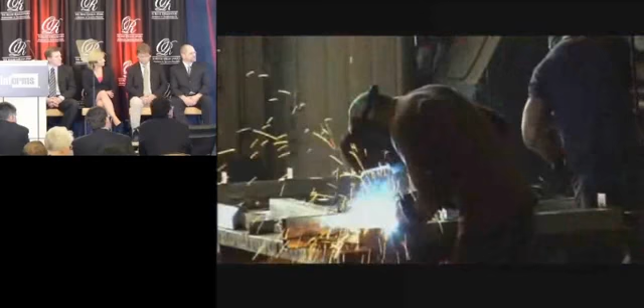For here, in New Brunswick, you can be yourself. You can belong. You can be better. This is truly what it means to be in New Brunswick. This is our story. This is our time. This is New Brunswick.

Aside from our interest and commitment to the Edelman Prize and the OR community, we all have something in common. We have traveled on highways to come to this event. Let's not forget how significant a role highways play in the day-to-day activities of our families, our communities, and our businesses. Good afternoon. My name is Dale Wilson. I'm the Assistant Deputy Minister of Transportation in the province of New Brunswick.

It's my job to help lead the rejuvenation of the agency from the inside out in a way that allows us to intelligently move forward in a period of constrained resources. Right now, New Brunswick is delivering a high-quality and sustainable highway network through the practical and effective implementation of operations research. Today, we're going to share our success story with you.

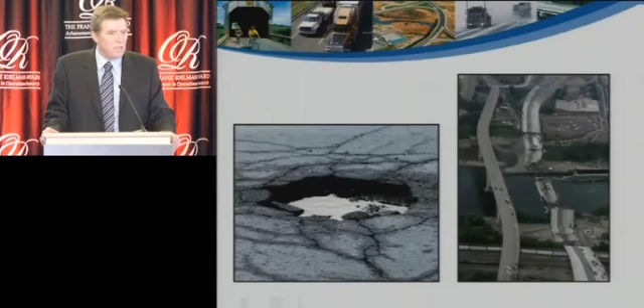We needed to be able to establish a long-term plan for strategic infrastructure investment that was based on science, and we had no idea of how we were going to do it. That's where our team and operations research came in. They conceptualized an approach that did away with planning and budgeting in silos. They implemented a solution that included all asset classes and moved from a fix the worst first approach to one of least life cycle costs. They developed a tool that optimized investments and scheduled maintenance and repair across all asset classes. The result has seen significant benefits to our department, our province, and the taxpayers.

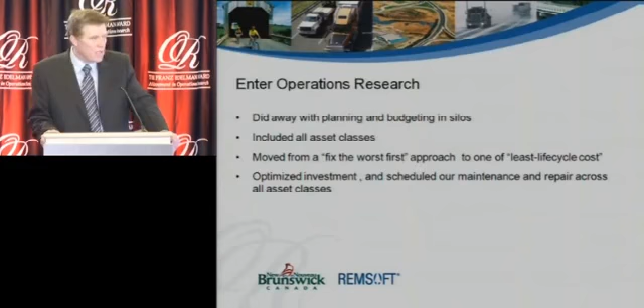Today you will hear about a province that needed to act, and to act fast. Our infrastructure was deteriorating quickly. We will tell you why operations research was the only way that we had that would address the challenge, and we will describe the operations research underpinnings that advance the theory and practice of transportation asset management.

We will show you an analytically driven process for evaluating requirements and scheduling maintenance and rehabilitation activity, and a tool for choosing among multiple and conflicting priorities over the long term. We've already produced savings to the taxpayer of $210 million and can see $1.4 billion additional dollars over the long term. And this is coupled with a significant overall increase in road quality.

Next, I would like to introduce you to my Minister of Transportation, the Honourable Denis Landry.

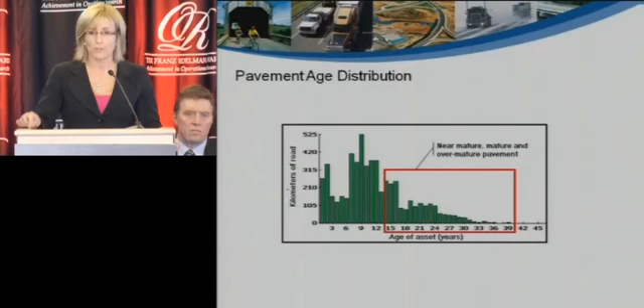Roads were deteriorating faster than we could repair them. Our infrastructure was literally crumbling. But we didn't have a way to show this to government leaders. We needed a radically different approach, and we needed to act fast. We needed a solution that clearly demonstrated to decision makers the full scope of the issue we faced, gave a solid justification for a long-term budget increase, and allowed us to start immediately, and then over time add more assets and data as they became available.

Our solution had to be able to consider multiple assets in the same model and had to perform trade-off analysis and network-level planning that would allow optimization across all asset classes over the long term. It had to model asset use due to socioeconomic factors and fluctuating traffic conditions as well.

It had to deal with adjacency and proximity issues. That is, the interrelationships between pavements, culverts, curbs, sidewalks, signs, and other features. The solution had to allow for multiple and conflicting constraints, including budgets.

And as a public organization, accountable to the taxpayers of the province, the department had to ensure that the plans would be transparent and defensible, enabling buy-in from decision makers and support from the public. Finally, the new solution had to be implemented within existing resources and without additional staff.

Our first step was to investigate the state of planning and best practices and new technology approaches worldwide. While we didn't find a solution that met our criteria in the transportation sector, we did identify an OR-based solution that matched our criteria and had been successfully implemented in the natural resources sector at hundreds of sites around the world. In fact, the technology had become the standard for the forestry industry, which is a major component of the

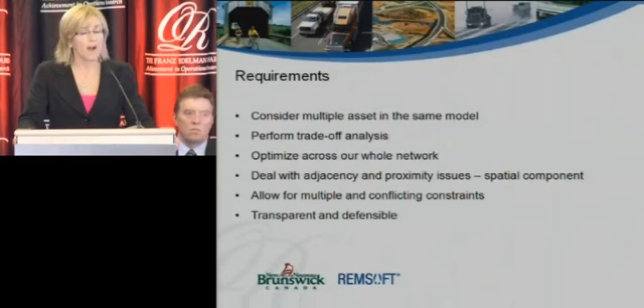With that information in hand, we moved to tactical planning tools to allow us to group assets together based on adjacency and proximity. Finally, we adopted a process for our engineers to review and assess the model results in candidate projects and work together to make final choices. Next, Hugo Funekes, Chief Technology Officer at REMSoft, will describe the technical, theoretical underpinnings of the solution.

Due to the highly spatial nature of the problem, the number of assets we had to consider, and the long time horizons involved, developing a single model that incorporated all aspects of the problem across space and time would have been difficult, and solution using exact methods would have been cumbersome at best. However, hierarchical planning approaches are used in a wide variety of applications.

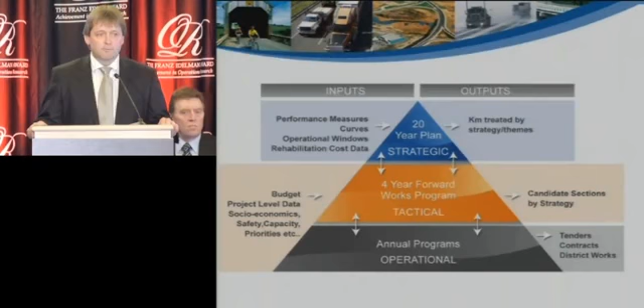In this instance, the Department have adopted an approach which is based on problem decomposition and uses separate but linked models to solve the problem in stages and at increasing levels of detail. In the first stage, an LP model addresses the long-term strategic aspects of the problem.

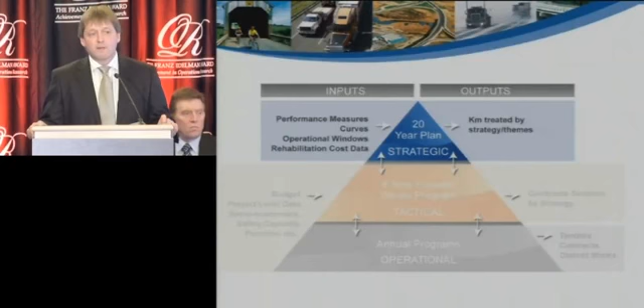This tackles many of the decisions necessary for the global planning problem, and the resulting schedule of activities forms an excellent starting point for the operational planning stages that incorporate increasing levels of spatial resolution across shorter planning horizons.

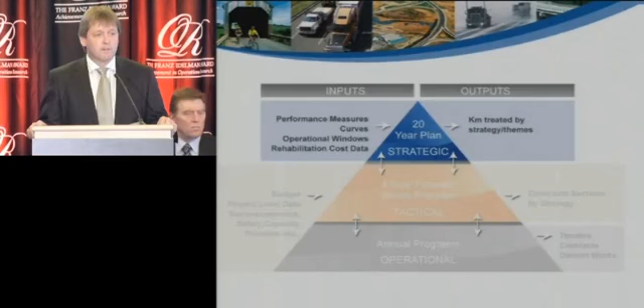In the second stage, we use the schedule from the LP along with a heuristic algorithm that uses adjacency and proximity relationships to create a more spatially reasonable, spatially explicit schedule of activities. This algorithm takes a meta-heuristic approach, incorporating Monte Carlo integer programming for initial program grouping, bipartite matching and enumeration for initial scheduling, and a greedy algorithm to achieve balanced workflows and costs.

And at the operational level, candidate projects are given to program managers, who then make final expert judgments on whether the model has suggested valid candidates. They review performance and look at videos of the highway surface and make adjustments for reasons such as functional improvements, operational considerations, and non-condition factors such as safety.

And of course, directives and operational budgets are monitored to ensure the overall program development reflects the strategic treatment established by the global LP model. It's easy to see the difference between good and poor quality roads. However, to develop a mathematical programming model requires more rigorous and quantifiable methods.

Fortunately, road quality is described through the use of numerical indices that have been developed according to international standards. For example, the International Roughness Index is a measure of road roughness. It is calculated by taking calibrated measurements with a laser while driving over a road.

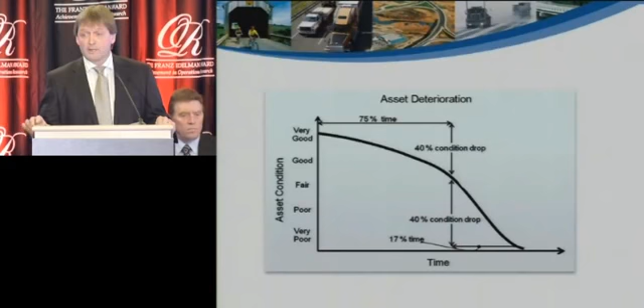End of useful life is another important concept in pavement management. Asset deterioration curves are specific to each of the various classes of roads, and depending on the road class and the nature of the last treatment, end of useful life can occur from 5 to 15 years after the last road repair. Another consideration is that as the asset deteriorates, the number of treatments available will change, and the costs associated with them can increase in magnitude dramatically.

An early step in the development of the model is to determine the number of unique instances of these curves that are required, and then to assign them to the appropriate curve in each class segment of the 18,000-kilometer highway network. Once treatment alternatives are defined, deterioration curves for each road class are developed, and the current inventory of assets is initialized, the conceptual modeling framework for asset management is essentially complete.

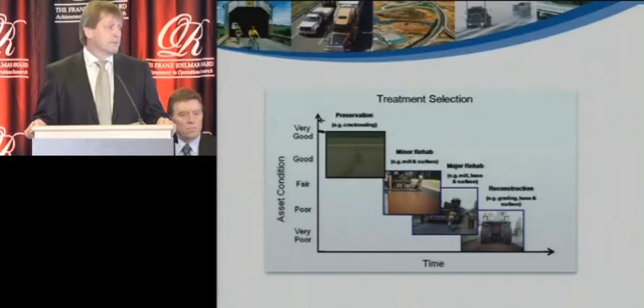The resulting solution addresses the strategic questions of appropriate budget levels and rehabilitation activity, and provides a schedule of activities to meet the department's objectives of service levels. That is the required condition for the roads over the entire planning horizon. However, we aren't starting now with projects that are grouped and ready to implement. At some point, spatial relationships at the project level must be addressed. The reason they were ignored at the strategic level is due to the combinatorial nature.

For example, if the department broadens the definition of proximity from two segments physically touching each other to considering all road segments within a 20-kilometer radius, they increase the number of proximal relationships from 28,000 to over 2.8 million. And given the department considers radii as large as 50 kilometers for grouping, problems can become very, very large.

However, from our experience in spatial planning, we know that problems of this nature can seem largely intractable to solution by exact methods. Therefore, we employ heuristic methods that quickly generate feasible solutions that are amenable to input from non-OR experts. Typically, the spatial schedulers run for 10 to 20 minutes, generating hundreds of solutions, and the top 5% are usually retained for consideration.

Next, I would like to introduce you to John McNaughton, Manager of the Asset Management Program at the New Brunswick Department of Transportation. John will describe the solution and planning process as it is working today.

As program manager, I was tasked with finding the answers to the following questions. How, when, and where should treatments be applied? What will be the effect on overall condition of the network? And what is the least cost for maintaining the status quo condition of the network? I should point out that while I use operations research every day, I don't have to deal with the math. I understand optimization and heuristics, and the natural modeling language used in the Remsoft modeling framework lets me develop a sophisticated LP model to address these questions.

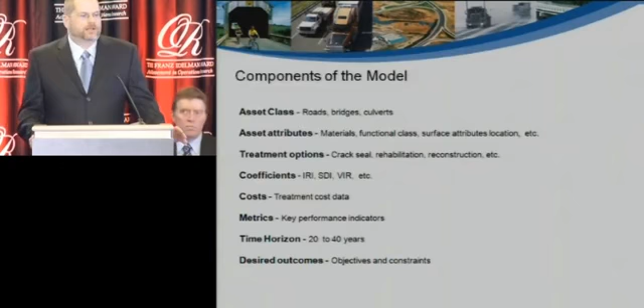And that's it. That's all I have to do to change my model. The ease at which I can set and change my model is very important to the department, since scenario and trade-off analysis is a key component of what we do.

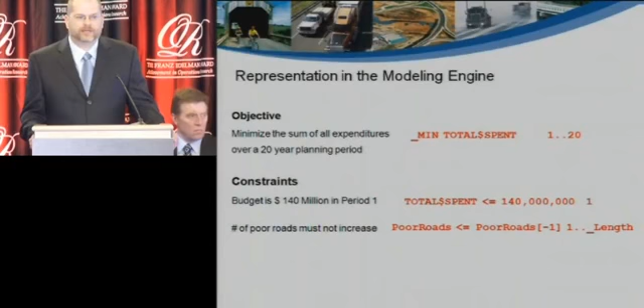We regularly get requests from our minister and other central government departments about the impact of a change in plans or budget. For example, if the minister is getting heat in the legislature related to our highway system and asks us about changing the plan, I can easily change an objective or constraint and re-optimize. I can show them the real effect of deviating from the optimal plan, and I can calculate the actual costs related to it.

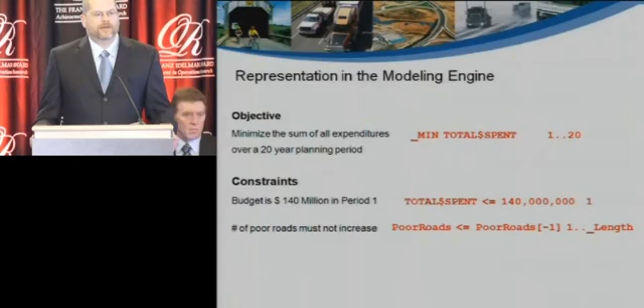Once I describe what was in my model I showed you earlier and specify my objectives and constraints, the software takes care of all the other housekeeping details for me. It reads my model, translates it into a matrix, and hands it off to a commercial solver, which solves the matrix and hands the results back to me.

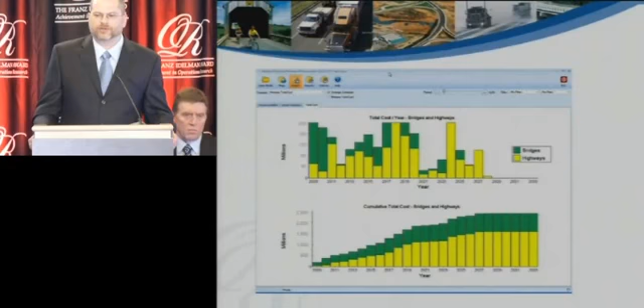Once final decisions have been made about these issues, the problem then shifts to how to implement the strategic plan on the ground. A key issue here is that the candidate projects identified by the optimization need to be grouped into functional projects such as those Hugo described earlier. Just because the spatial constraints were not considered in the strategic model doesn't mean that we can't identify the location of their treatments and their associated timings.

We can. All the attributes and outputs in the model are linked to our maps so we can explore the strategic solution spatially as well. This is an important tool for us in communicating our plans to politicians and other stakeholders. We can show them exactly where and when an activity will be happening over the long term.

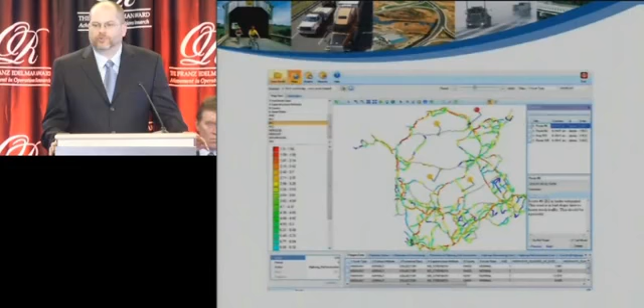At the same time, many of the scheduled projects still need to be modified to meet operational realities, such as minimum contract size, potential disruptions to traffic flow and safety. We need to group projects together in a way that makes sense from a spatial standpoint to achieve this. Here's an example of scheduling maintenance on a single asset type.

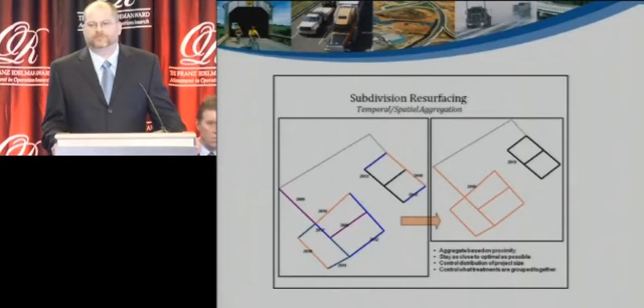Once I have candidate projects identified and grouped together, I turn them over to the district regional planning teams for evaluation and input. They scrutinize the candidate projects for potential problems, considering issues ranging from contract letting to reviewing video of road surfaces to verify road condition. Changes to the candidate projects may require only minor adjustments, or they may ultimately lead to changes in the strategic model.

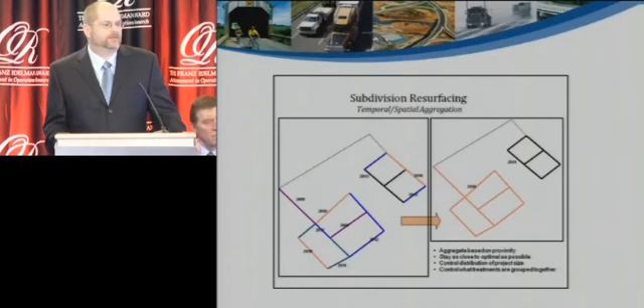And the hierarchical approach we have taken facilitates adaptive management and lets us build in a process of continuous improvement, something we set out to accomplish from the beginning. Next, Kim Matheson will describe to you the impact the solution has had on our organization and some of the benefits we are seeing as a result.

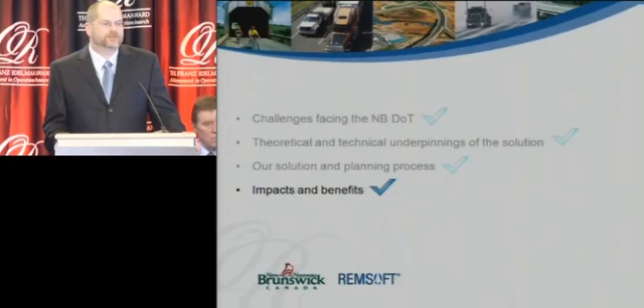Our asset management solution has met all the criteria we set for ourselves at the onset of the project. The very first and most important benefit we realized as a result was that we could now clearly demonstrate the infeasibility of the old approach, the long-term benefit of the least life cycle cost approach, and the need for a substantial funding increase. Let's look at what we found in a series of scenarios we ran early in the project.

To illustrate the consequences of each scenario to senior management and government, we used a simple performance indicator of the total number of poor roads in the province. First, we decided to see what level of service we could attain with a traditional $50 million budget using operations research approach. As you can see, continuing this way would have meant that the number of kilometers of roads in poor condition would have continued to grow at a rate that was beyond the ability for us to control. Intuitively, our management knew the problem existed all along, but the magnitude was really quite a shock.

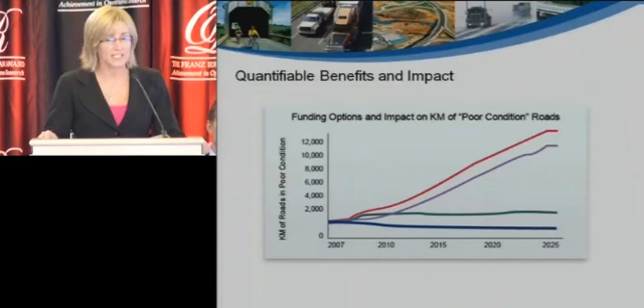We needed to find out what would happen if we significantly increased the budget, but we did things the old way. That was the key, using no optimization and the fix the worst first approach. We used a rules-based simulation to determine what would happen if the same threefold increase in funding was used, and take a look at what we found. This sealed the deal, as it were. The number of poor roads increased almost as quickly as with our traditional $50 million budget, despite the tripled funding. Our analysis made it apparent that the selection of what assets to fix and when was just as critical as the funding level. Simply increasing funding levels with the old approach to planning would not improve the overall network condition.

As a result of our $2 million development investment in the asset management system, savings are tracking our projections. We have saved $210 million to date, and we are projected to save $1.4 billion discounted over the next 20-year planning horizon, even taking into consideration the significant increase in funding we receive from government. The $1.4 billion savings are calculated by subtracting the projected cost of the optimal approach, $2.2 billion, from the projected cost to attain the same condition of the road network using the traditional fix the worst first approach, $3.6 billion.

Once the solution was implemented in 2007, the department halted the growth of poor roads. It's important to note how closely our actual results since 2007 track our original projections. This is further evidence that our solution provides us with the information and the plans we need for our ministers to stand up in the legislature and justify the request for sustained funding for the program on an ongoing basis.

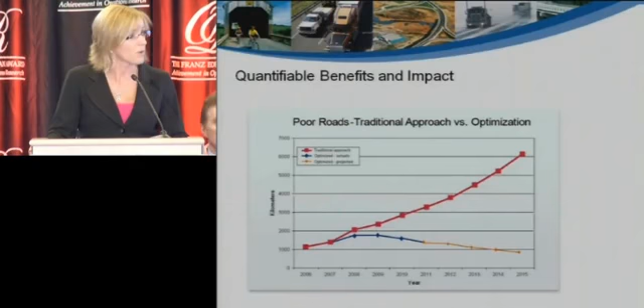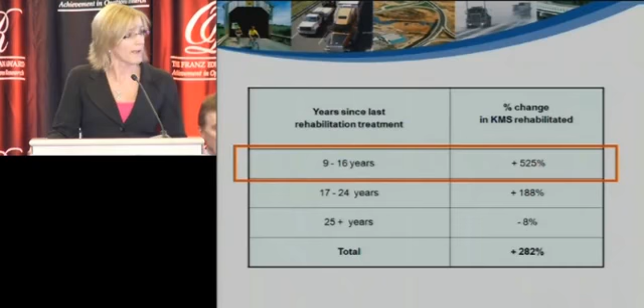Implementing our solution has transformed the way we perform the business of managing public infrastructure, resulting in improved overall management oversight, and has impacted our organization in a number of ways. The solution has removed the politics from paving. As a result of the mathematical optimization techniques and the clearly defined goals and objectives, strategies and plans are now more transparent and easily defensible. The new solution lets us make long-term decisions with more confidence and commitment. And because the consequences of deviating from the optimized plan can be easily quantified and communicated back to the stakeholders, politics has largely been removed from the decision-making process.

Economic and environmental benefits arise out of an overall improved infrastructure and planning process. Earlier and more coordinated rehabilitation leads to less intrusive, energy-consuming highway treatments.

In addition, the optimized life cycle management approach reduces the annual maintenance demand and associated costs. Smoother roads and more environmentally friendly approaches to reconstruction and lowered infrastructure debt are all positively impacted. The new approach has also broken down communication barriers and provides a touchstone to every manager in the department, who are increasingly reliant on it for information and analysis.

This approach created new levels of collaboration across the organization and helped to dismantle barriers across silos, allowing managers and executives to pose what-if questions and explore multiple scenarios quickly to ensure all relevant decision-making avenues have been explored. To date, the department has successfully demonstrated the benefits of operations research and implemented the solution within our corporate asset management system framework. Since the solution was implemented in 2007, bridges and culverts have been added to the model and will be included in the 2010 planning cycle.